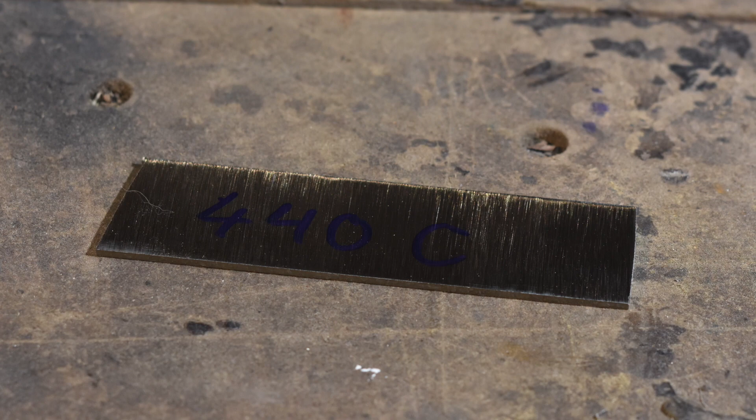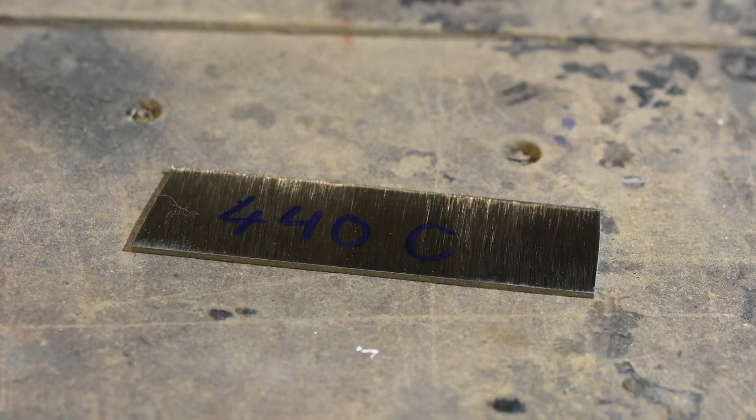Befitting the theme of this video, which is mucho mas power tools, we'll be using stainless steel for the blade of our wood carving knife. What does that have to do with power tools? Well, in the previous video we heat treated high carbon steel, which we can do effectively with relatively low tech equipment, but stainless steels require much more precise temperature controls. In this case, I'm using the classic cutlery stainless steel 440C. Much maligned, but really not a bad steel at all.

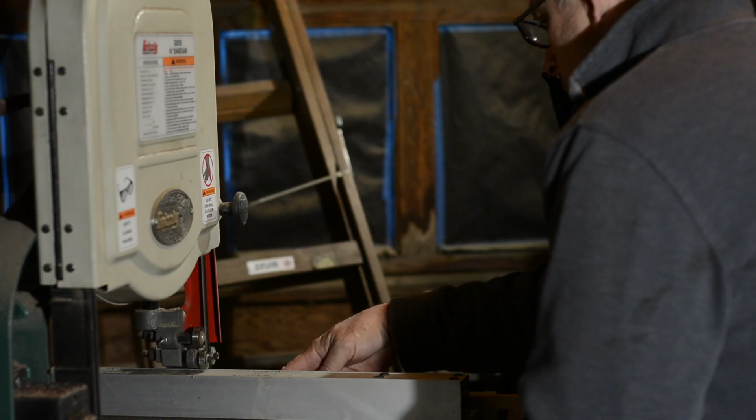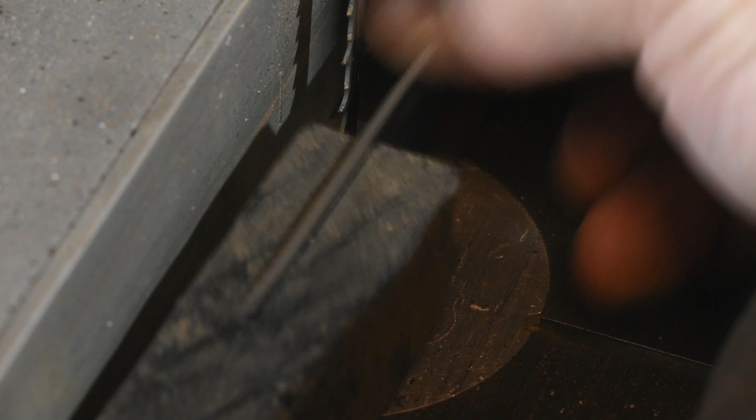For the handle of the blade, we'll be using this little piece of scrap Gabon ebony, the same kind of wood used for piano keys. It's hard, durable, and beautiful. What's not to like? I'll begin by using my bandsaw to clear out the slot. The steel I'm using is about 0.08 inches thick, so I just keep moving the fence, pecking away until the steel just barely slides into the slot.

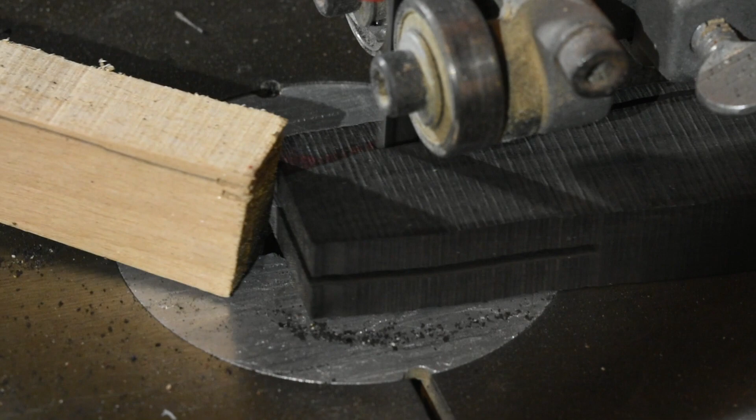Here I'm roughing out the basic shape of the handle on my 2x72 inch belt grinder.

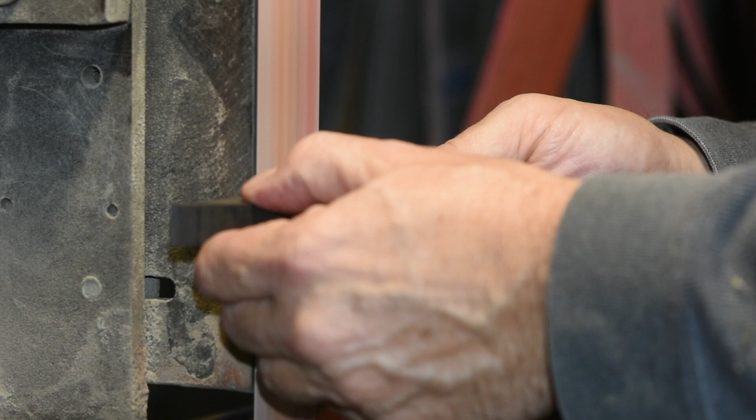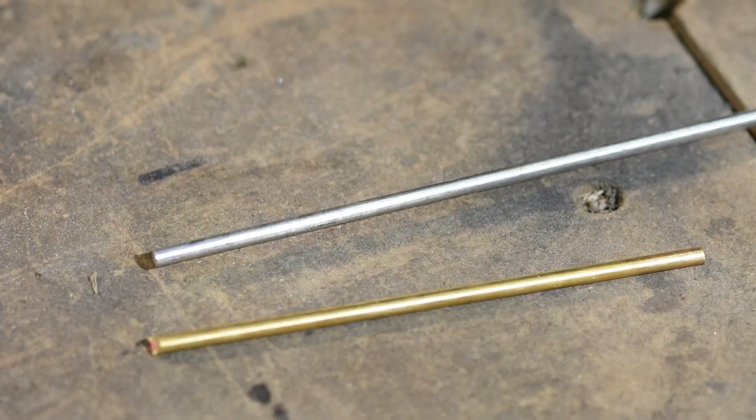Next, I'll go to the drill press and drill holes for 2 pins which will retain the blade in the handle. I make sure the blade blank is firmly seated before drilling the first hole. I don't want it to wiggle around. I'm using 1/8 inch diameter pins. You can buy this kind of stock at hobby stores and home improvement stores. In fact, you could use anything from stainless steel to nickel silver, but as you see, I'm using brass in this case.

Once that first hole's drilled, I'll insert a locator pin and then drill the second hole. If you don't take the step of using a locator pin, good chance the blade will slide around and you'll end up with holes that are out of register. Or as they say around here, it'll be ruined.

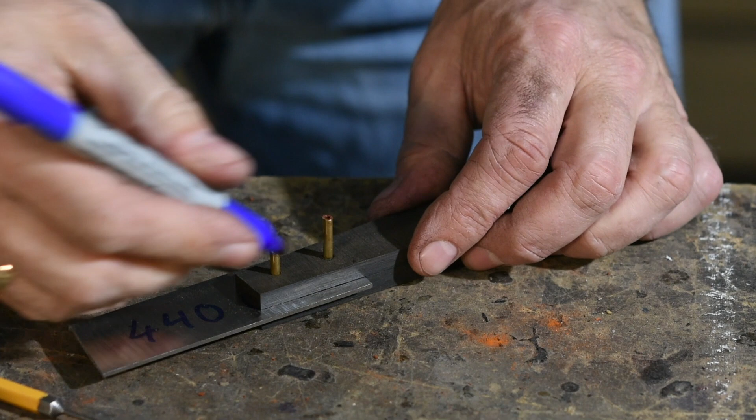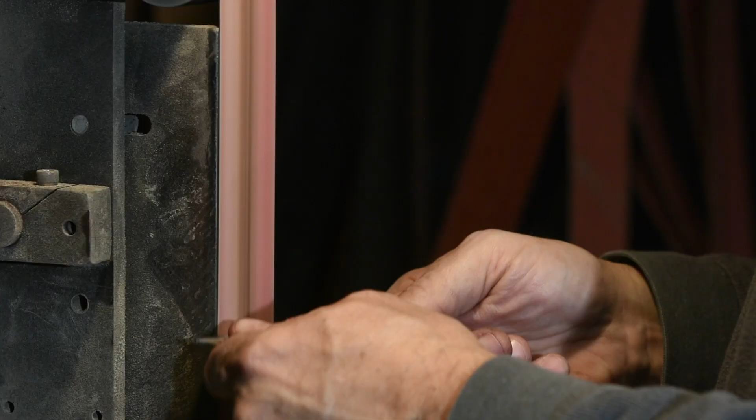Now I'll draw the basic shape of the blade. It's a Wharncliffe, meaning that it has a flat cutting edge and a curved top. Good for consistent cuts in wood from one end of the blade to the other. I'll give the blade its shape on the belt grinder using a 40 grit ceramic belt. I want it to flow organically from the handle, so I'm grinding them together.

Once I've got an overall profile that I'm happy with, I'll start grinding the bevels into the blade. You'll notice that I threw a little tape around the handle. Vibration from the grinding can jiggle the pins out, so this saves me from fishing around in a bucket of rusty water looking for them.

How would I know this? Friends who are less perfect human beings than I am have told me, but it's never happened to me or anything.

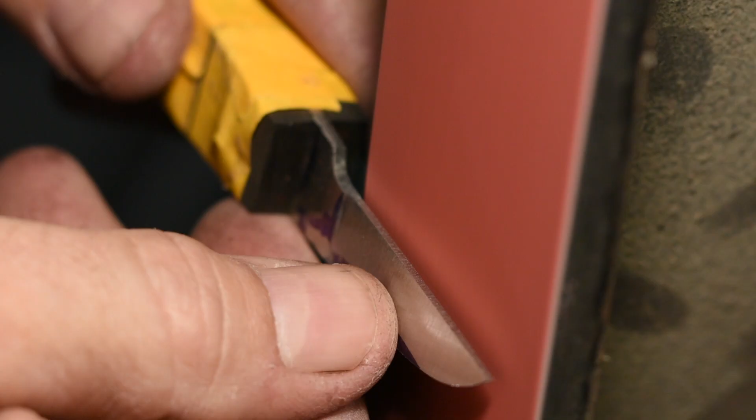Grinding skinny little pieces of steel like this is pretty tricky, so I'm just taking it nice and slow. Get too aggressive and you'll end up blowing right through it. Once the bevels are where I want them, I'll work my way up the grits, 60, 120, 220, 400.

If you're considering getting a belt grinder and don't know what belts to get, I'd buy a bunch of belts in that sequence I just gave you, 40, 60, 120, 220, and then 320 or 400. Just experiment with them and see what sequence works for you. It's not uncommon for me to skip from, say, 40 to 120 or that sort of thing. It really just depends on the job, the steel, how worn the belts are, and so on. Now I've got the bevels formed.

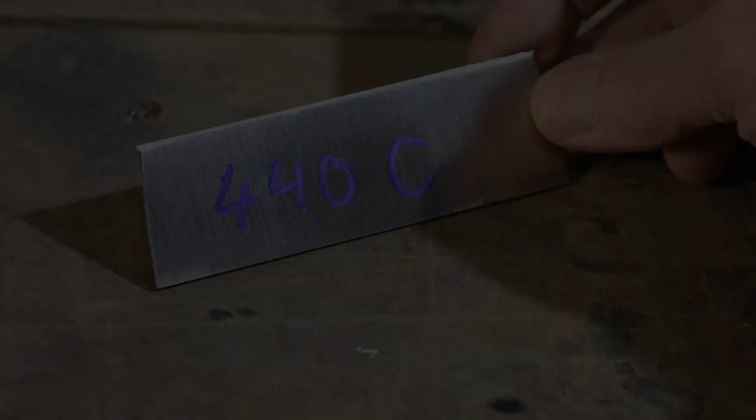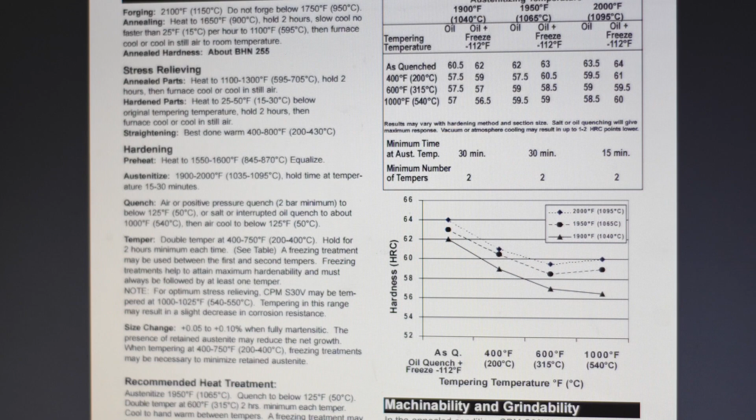Time for heat treating. Virtually all steels that are capable of being hardened will have heat treating recipes available from manufacturers of the steel. These are found in the form of technical data sheets. In some cases, they may take a little decoding. A technical data sheet may refer to the austenitizing temperature. That's how hot the steel needs to be heated before being quenched.

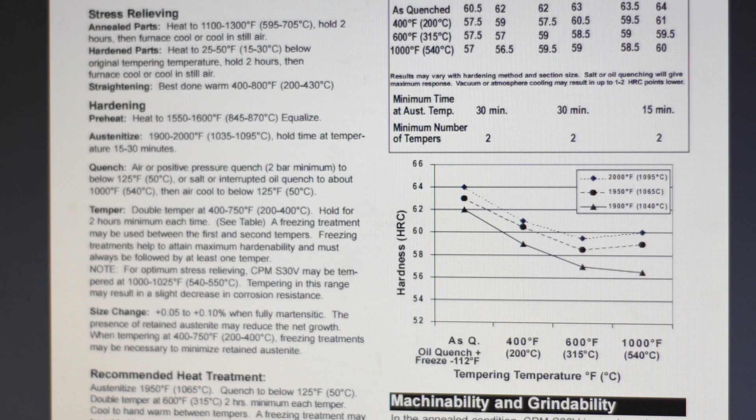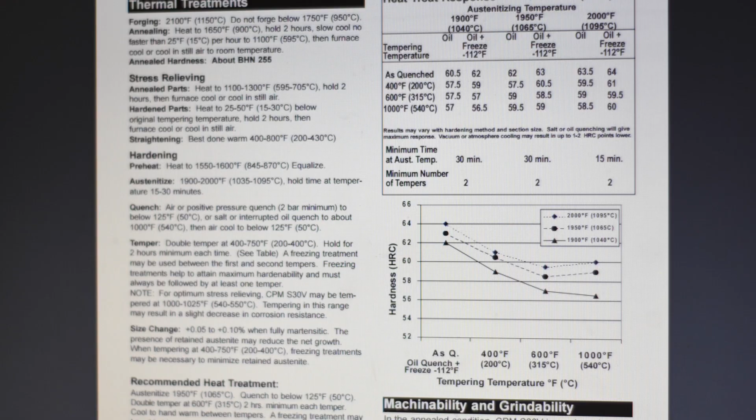They'll also sometimes refer to soak times. The soak time is how long you leave it in the heat treating oven at a particular temperature. In this case, I'll be heating the steel to 1900 degrees Fahrenheit and soaking it for 30 minutes. There are sound and complex metallurgical reasons why you should follow manufacturers' heat treating instructions relatively carefully. The old heat it to cherry red and dunk it in a bucket of horse piss approach won't hack it with stainless steels.

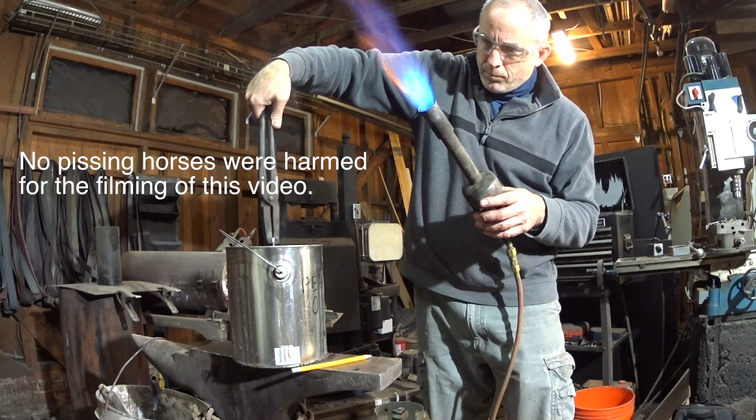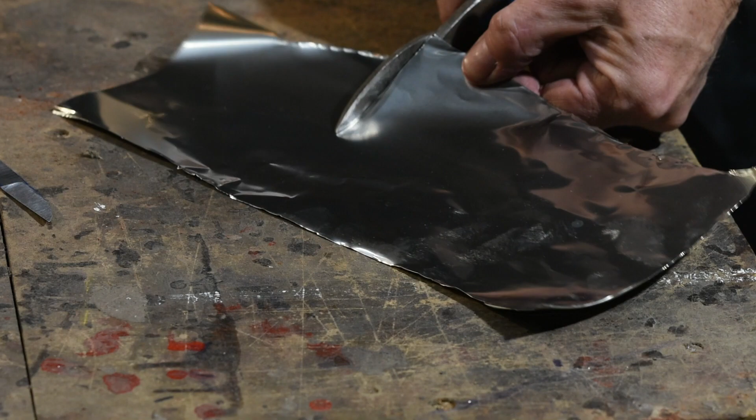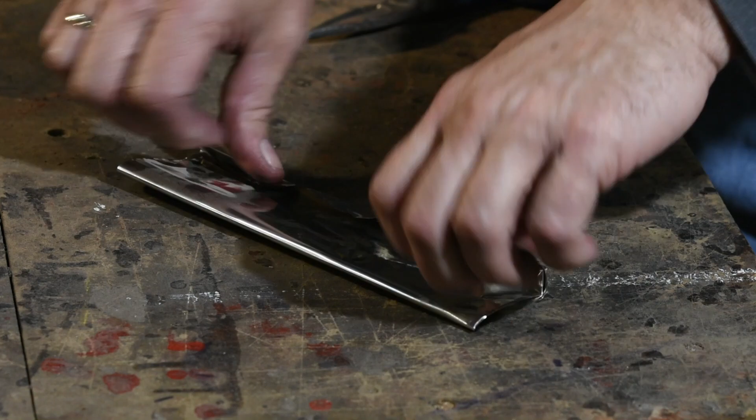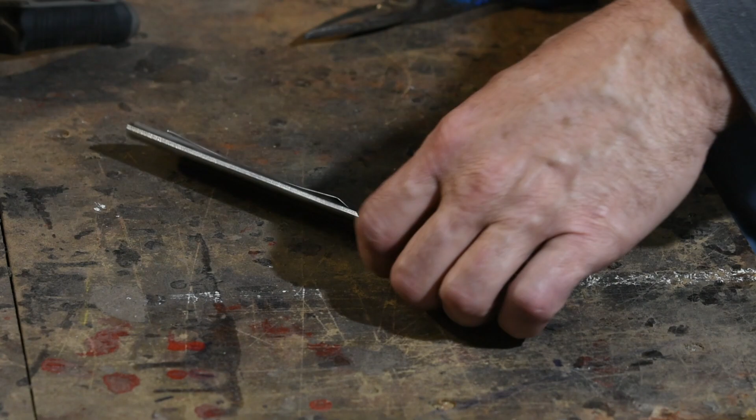Because of the high heats and long soak times required for stainless steels, these steels have to be kept away from oxygen, which will leach out the carbon, create lots of nasty scale, and weaken the steel. In industry, they're typically heated in vacuum furnaces or in non-reactive gases or sometimes even molten salt. But we'll wrap them in stainless steel heat treating foil to shield them from the air. It's a little bit like folding up a razor blade. This stuff's really sharp, so you have to be careful in order to avoid cutting yourself.

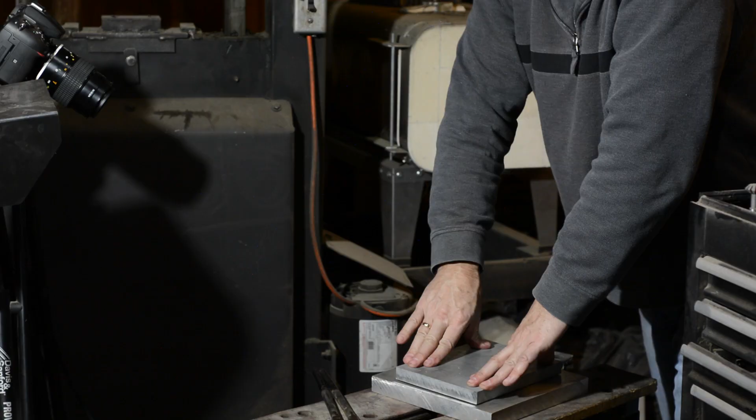After soaking, the blade and the little packet it's in is taken out and pressed between two aluminum plates. You can also quench in still air and it'll work just fine. The plate quench approach lessens the likelihood of warping, however. The steel is then given 2 tempering cycles of 2 hours each at 400 degrees Fahrenheit. And here's the blade after heat treat.

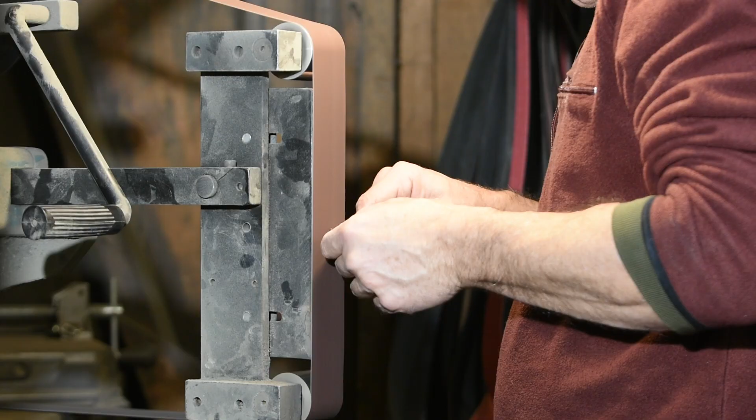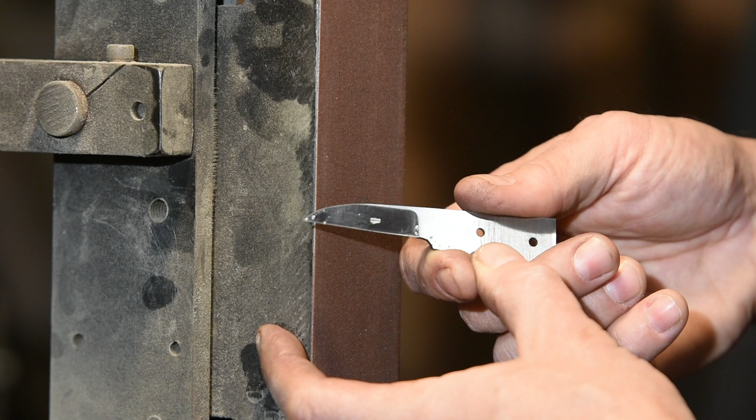Next, I'll clean off the oxides and bring the bevel to its final size. I used to leave a fair amount of meat and take it off here, but now I basically just clean off the oxides and make sure everything's nice and even.

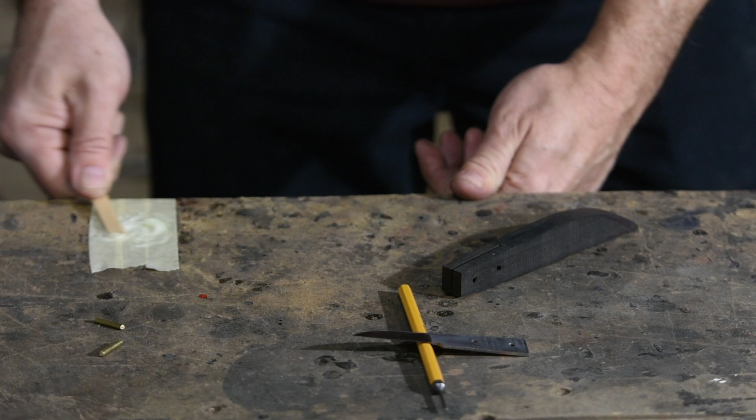Now we're ready to assemble the whole schmear. A little bit of 2-part epoxy will keep everything together. In the companion video, I peened the ends of the pins, giving a mechanical lock. Here I'm just relying on the epoxy, which won't last as long, probably, as the peened pins. But guess what? This won't go anywhere for a long, long time.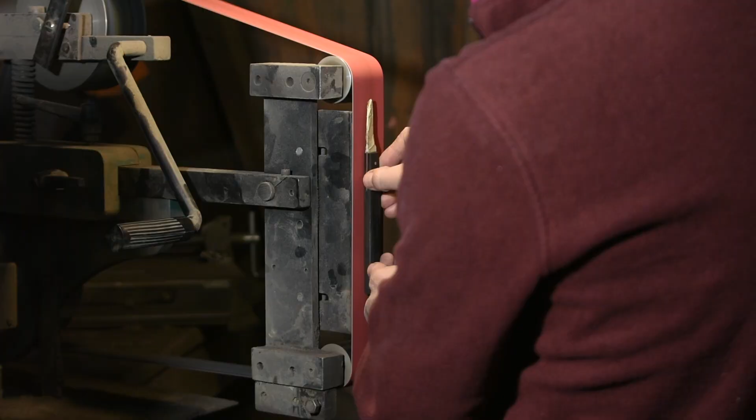Now I'll go ahead and grind the handle to its final shape. I'm looking for nice smooth curves and an organic feel that will be comfortable to use. One of the cool things about belt grinders is that you can use all kinds of different surfaces of the grinder that were not actually intended as grinding surfaces when they were originally designed. In essence, this allows you to do slack grinding on a flat platen setup.

That said, if you're going to do this and use that top surface like I'm doing here, you want to be ultra careful. All it takes is for the belt grinder to sling that knife one time and you could be dead or lose an eye or whatever. I've never in 15 years of using a belt grinder had it throw a knife, but if it did, big problem. So I always stand to the side if I'm using that top part of the grinder.

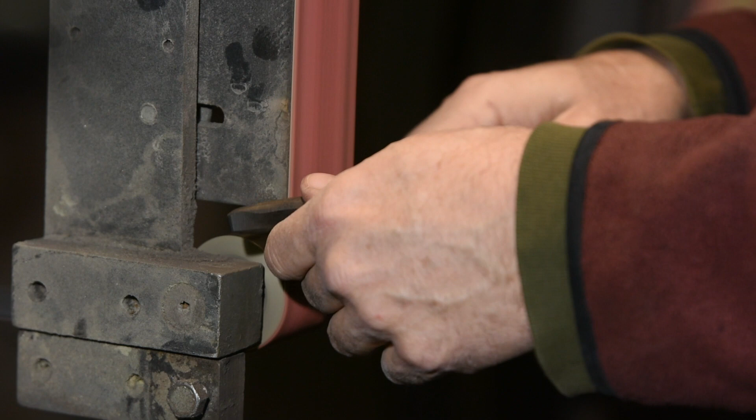At this point the blade is masked off so I don't scratch it up, and I'll take the ebony to its final level of finish by hand. I'll sand the handle all the way up to 1000 grit. Now, if this were maple or cherry or something, it wouldn't be worth going up to that high a grit, but oily exotics like cocobolo, rosewood, ebony, and so on reward the elbow grease with a very beautiful shine.

The final step, a simple application of furniture wax. I'll buff it out with a paper towel. Now, I could get a little bit harder shine if I hit it up with the buffer, but my buffer's kind of hidden away in the corner of my shop right now, and it's a little bit of a pain in the neck to film. So, guess what? We're sticking with this. And there we have it.

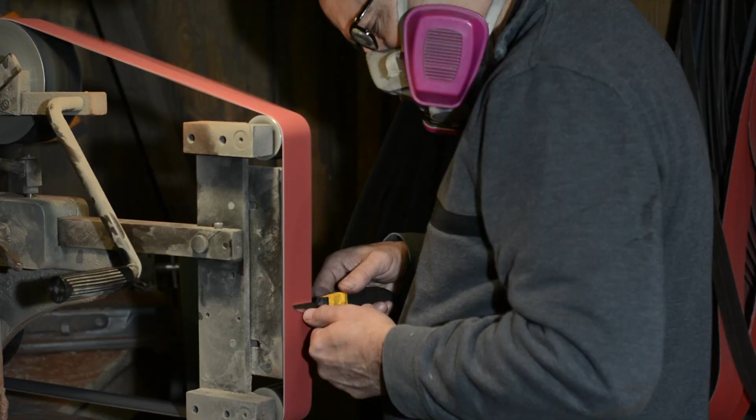So, back to back, here are the two blades. One, all handwork, the other, machinery to the max. Which one's better? I think you'd be hard pressed to say. One took about 2 or 3 times longer, but the level of skill required is basically the same for each one. There are folks who think that just because you use a machine, that means you just kind of punch a button and out pops your widget. Not hardly. Running a belt grinder really well, for instance, takes a great deal of practice and a high level of skill. What you sacrifice by using hand tools is not quality, it's just time. And if you're doing this for a hobby, spending time doing the work is what it's all about.

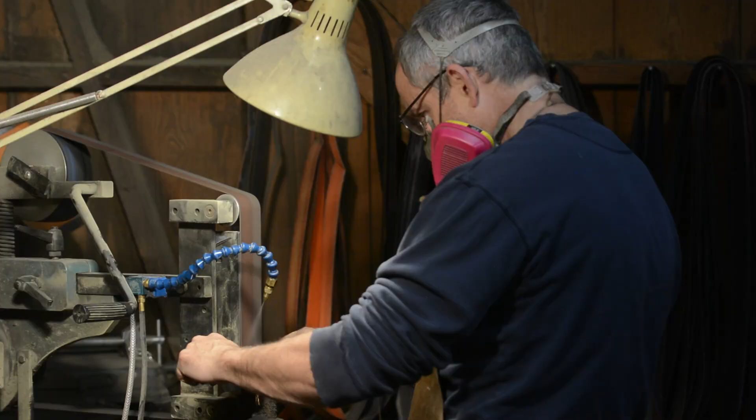So there's really not a reason in the world why you'd ever feel the need to bug your wife about borrowing your kid's lunch money to buy that $3,000 belt grinder. Yeah, no. Of course you're going to buy that $3,000 belt grinder, but you don't have to do it right now. Besides, what could be more character building for your kid than to do without lunch for 2 or 3 years in order to pay for daddy's belt grinder? Repeat after me. It's all about the children.

So I hope you enjoyed our tale of two knives here. Power tools, no power tools. We end up with something that's pretty cool whichever route we go. So wherever you're coming from, whatever your shop's like, believe me, you can get out there and make high quality knives just like the pros.